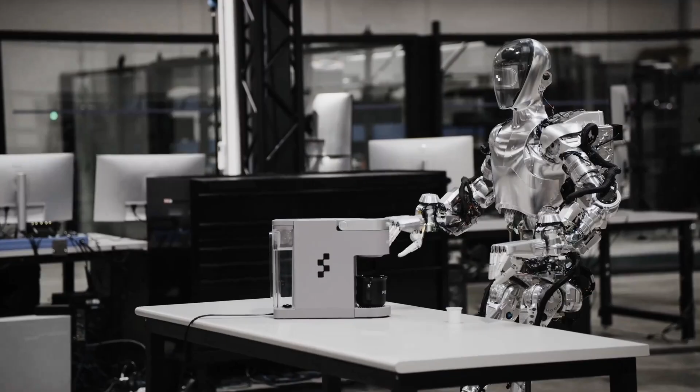With Tesla dropping a video yesterday of the Optimus humanoid bot folding a shirt, albeit being teleoperated, and Figure Robotics dropping its video of its Figure 1 humanoid bot operating a coffee machine autonomously, the pace of progress in robotics AI is now in full gear. Today, let's take a look at Elon's comments showing his concern about making sure he will have a strong influence on AI robotics. Let's also watch videos of 4 different robots and see this progress firsthand.

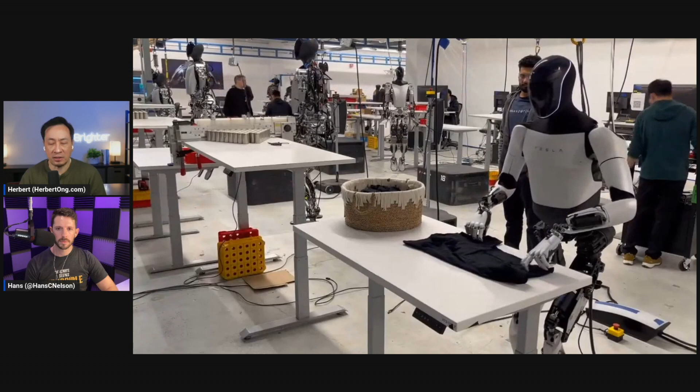So here we've got Optimus folding a shirt that we saw yesterday. I think many of us have already seen this, but it's teleoperated. So you can see, take a look on the right here. Every once in a while, you'll see the human's hands showing, and it's controlling this. But what's interesting about this situation here is that they're just testing. They're not testing the brain right now. They're testing to see if the hardware is now at the point with the hands specifically and the wrists, is it at the point that it's the dexterity, is this ready?

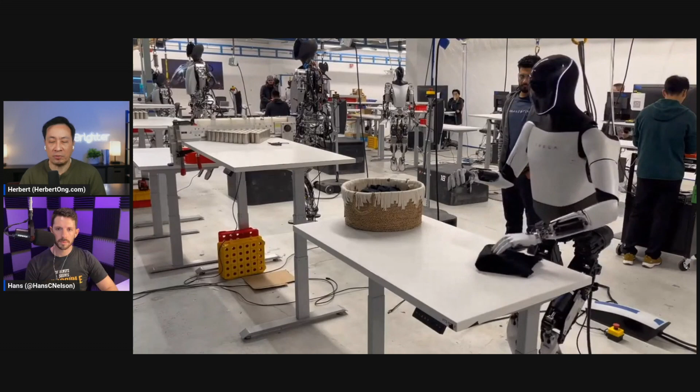So the question I think we should be asking ourselves is this bot now, kind of like the hardware at least, is that now getting to the point where it is design complete? Here's Elon just making sure that we know that this was not done autonomously, but it will be able to do this fully autonomously in an arbitrary environment in the future.

This is Milan Kovac. He is one of the key directors of the humanoid bot, and this is what he said: the reason why they're doing complex tasks through teleoperation is to verify that our current hardware has the dexterity to do those tasks.

Now it looks like they've done that, and so now he's saying it's going to be mostly software and AI work. And they're doing this too because teleoperation lets you train the end-to-end neural nets, and there's been grad students, Mobile Aloha, who showed that if you just do teleoperation 50 times, you can then get the bot to do something autonomously with 80% success rate. So this looks like it's moving forward. Any comments on that, Hans?

Yeah, I think that we've seen a lot of very impressive things out of the Optimus bot over the last year, and a lot of coordination.

I think that the Gen 2 reveal obviously surprised a lot of people, and so the fact that they're this deep into the design process and it really does look like it's ready for mass manufacturing is important. And I think this video is another good proof case because exactly like Milan said, what they're doing now is

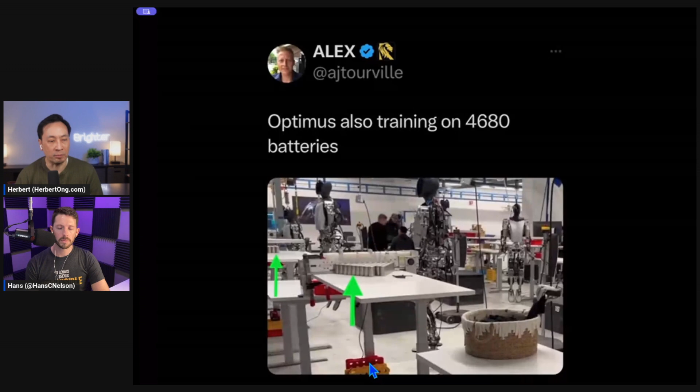Have you given it more thought?

I think one of the tidbits from Elon's tweet was that he expects the Optimus Gen 2 to be able to do things in a general or arbitrary environment. One of the cool things about having multiple generations of Optimus bot that they're using to generate training data is that the differences in hardware between Gen 1 and Gen 2 actually contribute to the ability to have a much more general model that's adaptable to various form factors. So it provides high quality variance in the training data that will be an asset moving forward.

And it's awesome to see them working with 4680 batteries. It makes me wonder if one of the first manufacturing line jobs they'd like to automate with Optimus could be in 4680 cell manufacturing. That's something I'm really looking forward to learning more about.

I think so too, right? I mean, why would they have that there, and multiple workstations? So we'll be seeing something they can grab with their hands. Scott Walter doesn't think so, because he thinks the 4680 pack and pick and place are already fully automated. We'll see.

Okay, so let's talk about the robot wars. This person, Christian, said the robot wars are here and the score is 1-1. Just last week—can I go back just a second and respond to Scott's thoughts before we move on to the next one?

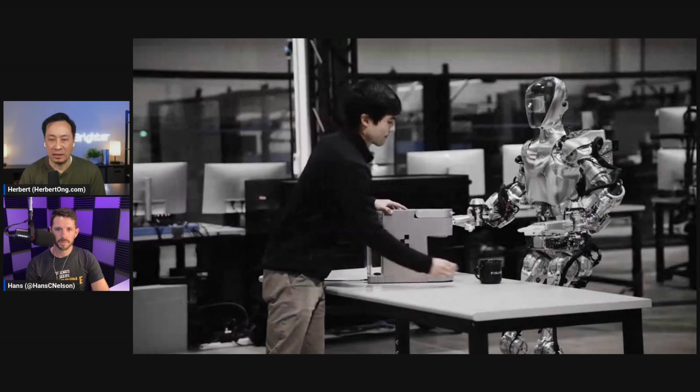Hey, Figure One, can you make me a cup of coffee?

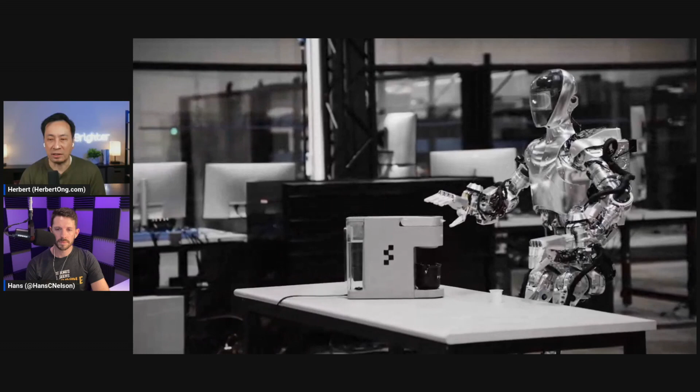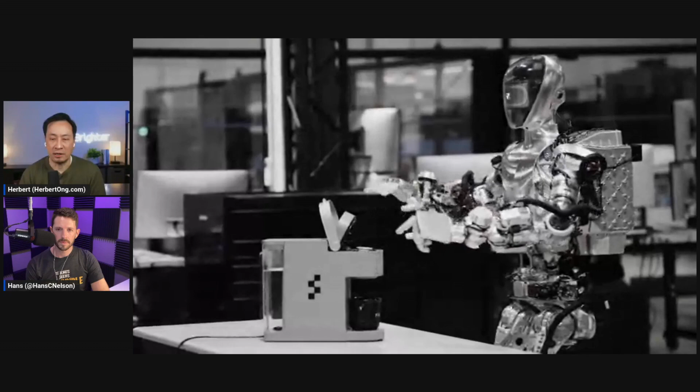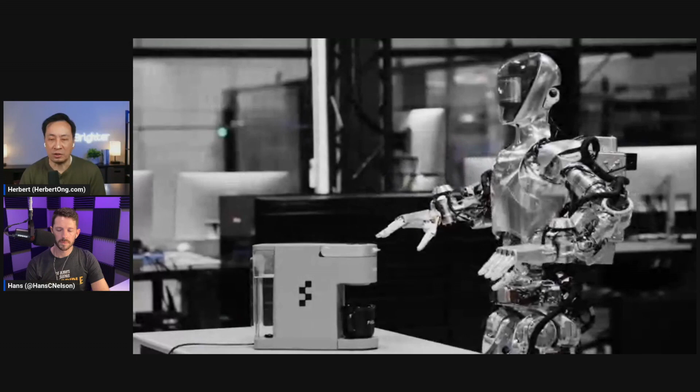I'm going to turn off the audio, but basically he just says make me coffee, and you can watch Figure One, which has been trained by watching videos, possibly also teleoperated, I think. You can watch it putting the coffee cup in, closing the lid, it knows to press the button. Look at those beautiful finger movements it's able to do. That shows you why you need a humanoid bot, because it can then do something like this and no one else can.

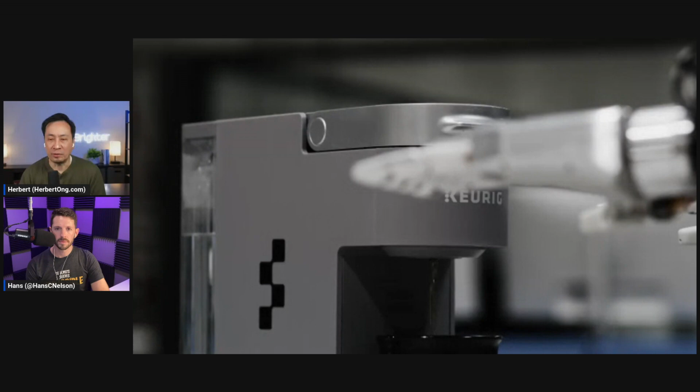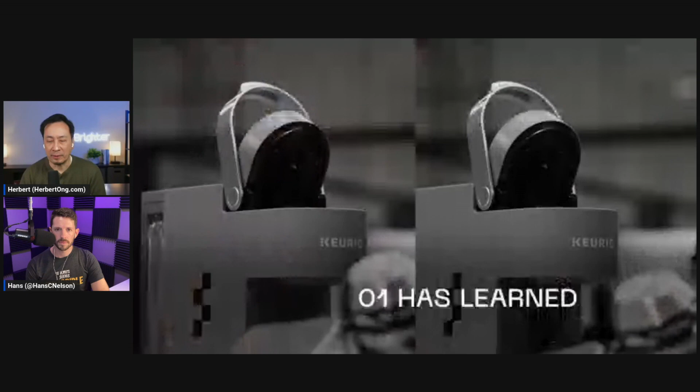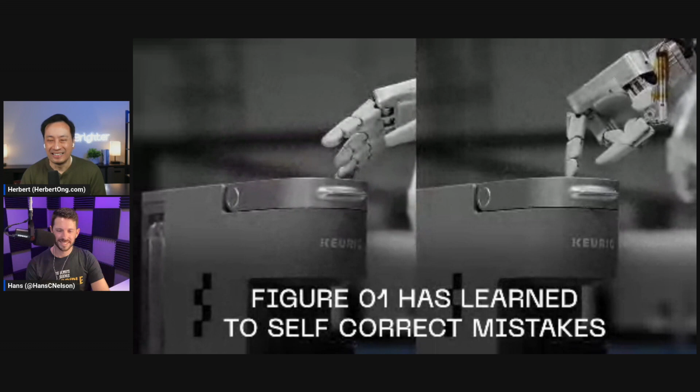And then this part, when they show this, it demonstrates how incredible the bot itself figured things out. That's pretty simple, but then here they show Figure 01 learned how to self-correct mistakes—it tried to put the pod in, but it was off, and it knew it needed to fix it so it would fit. Look at that, and it's using its pinky. That's the difference between bots in a structured environment with precise locations, versus one where you just give it an instruction and it figures out how to do it correctly.

Should I pause there before I show the other videos?

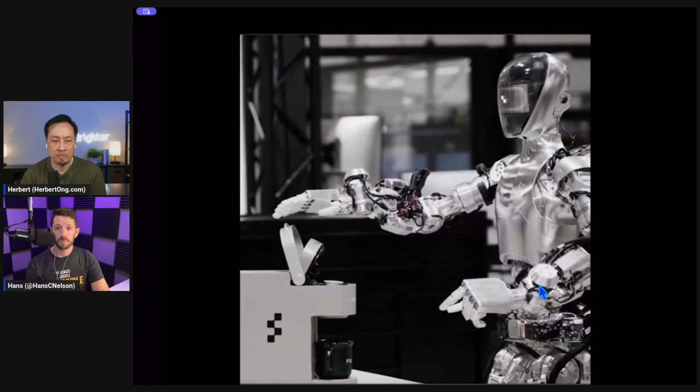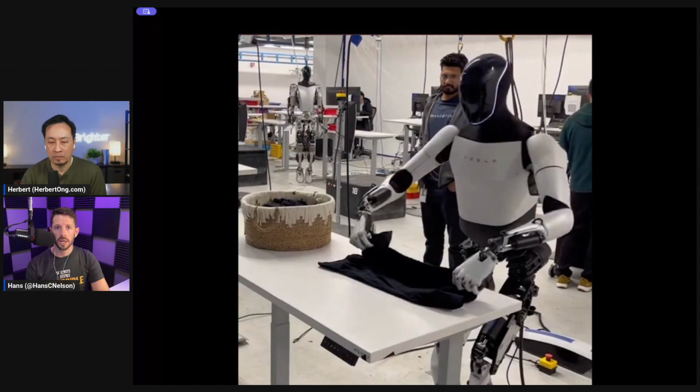I would just say that video is extremely impressive for them to have. Obviously the Figure bot, to me, seems like something that's mechanically in between the Bumble C prototype and where Tesla arrived with the Gen 1 bot. And I believe the Gen 2 bot is even much higher quality than that. But they do have great hands and a number of good things. For them at this stage, as an early startup with not that many employees, to accomplish these tasks in an end-to-end neural net training architecture is a phenomenal accomplishment and really bodes well for their future.

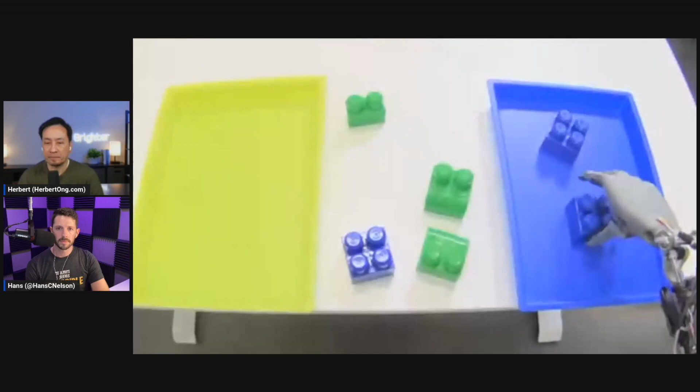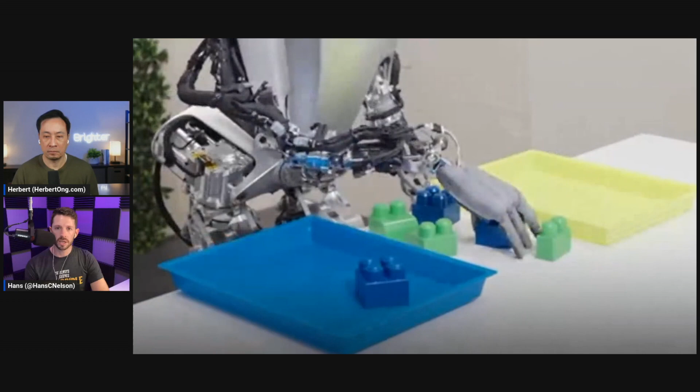No, it's not, right? So here is that video you're referring to about sorting the blocks. Yep, and this was trained completely end to end. This is completely autonomous, there's not a teleoperator here. The speed, smoothness, balance, and dexterity of the hands here is all a bit further beyond what we have seen from Figure AI yet.

That doesn't mean the pace of progress that they have isn't very good. I expect them to be able to demonstrate this type of capability soon.

The one thing I actually do have to give to Brett Adcock and Figure AI that is different from what we've seen demonstrated here by Tesla is the fact that the human actually prompted the Figure robot to perform the action of making coffee by natural language through voice. There is a possibility that he said that, but there was someone in the background pushing a button to start the program for it to actually do that. But it very well may not be the case.

We've seen these multimodal LLMs be able to do this type of thing. So it's very possible that Figure AI has that ability built in, that it can hear a person, get commands, and respond to those commands directly. In which case, that is something they have demonstrated that I don't believe we have seen in a public demo from Tesla. Hopefully that is true.

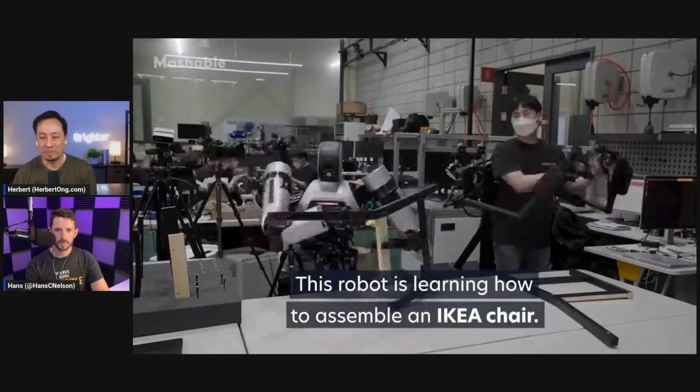This was created by Naver Labs, Ambidex. Let's watch this video. Look at that, I can't believe they can do this.

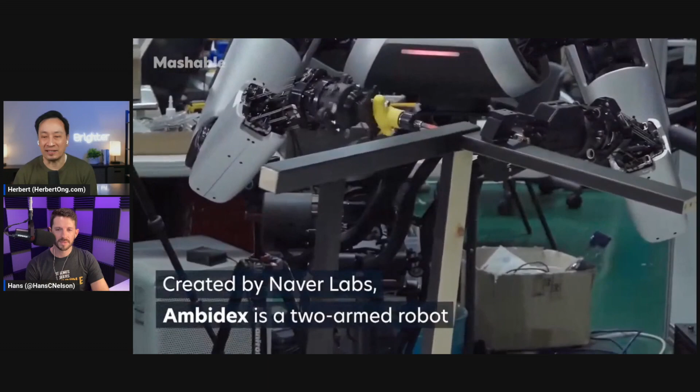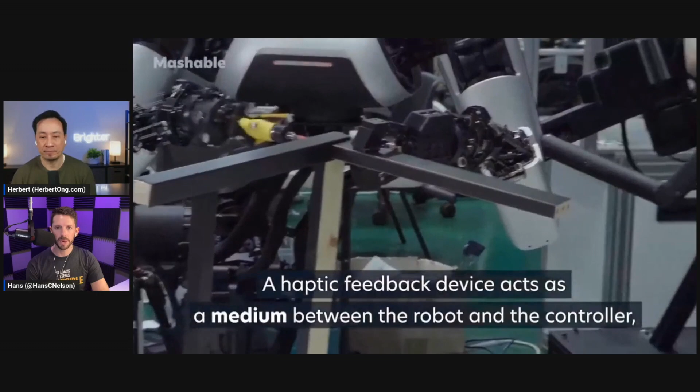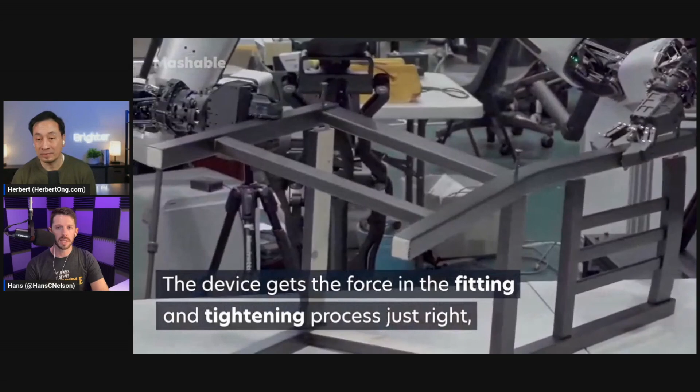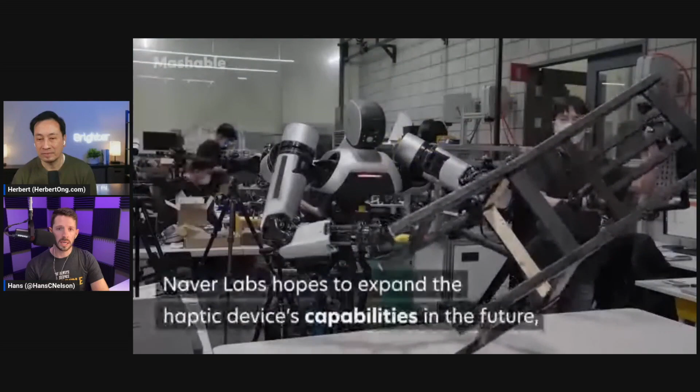Now, of course, you can see that it's teleoperated right now, but it's using human tools. This kind of builds on the point Scott made about the Mobile Aloha bot, which has a very simple, rudimentary gripper that's basically just two pinchers, almost like two thumbs. So it's cool to see proof cases where these very simple actuators can accomplish very complicated real world tasks, because that's further evidence that a bot with good, high quality hands that mimic humans should be able to do even more useful tasks. So I think that's really cool.

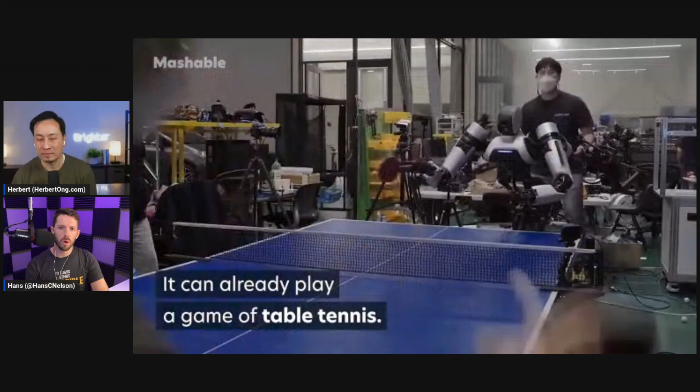This bot itself is interesting, one I hadn't seen before. I think what's been holding back robotics for a long time is the quality of the neural net control system available up to this point. Now that we're seeing these advancements in large language models and artificial intelligence across various fields, we finally have the control systems necessary to give these robots real, high quality, useful jobs and the ability to complete them.

I think the next decade or two is going to be for the field of robotics what the last couple decades were for the app ecosystem built on the foundation of iOS and the iPhone. Oh my gosh, this is so exciting, it's unbelievable. We're witnessing it in our lifetimes - bots becoming alive, humanoid bots walking, using their hands and fingers, basically doing anything a human can do, while at the same time AI is progressing.

What you just said is exactly what I was going to show next, which is Brian Krassenstein's post: extrapolate the progress Tesla has made over the last 12 months on Optimus, and consider the rate of progress we're seeing in machine learning and AI. Within 5 to 7 years, Optimus-like robots will be able to do most mundane tasks that human beings do. It's going to happen much quicker than people realize. People underestimate the convergence of multiple exponentially progressing technologies. The next decade is going to be absolutely insane.